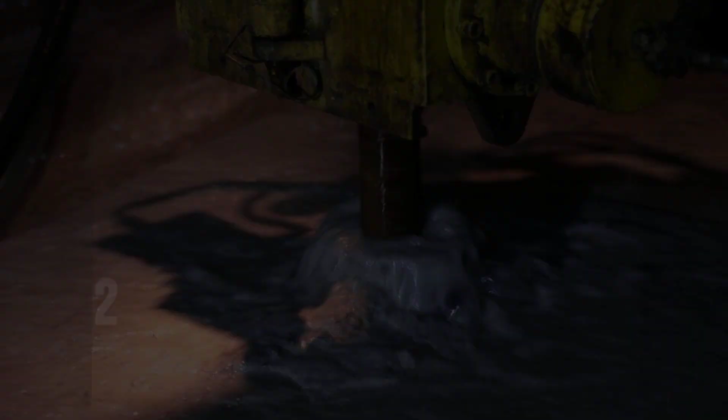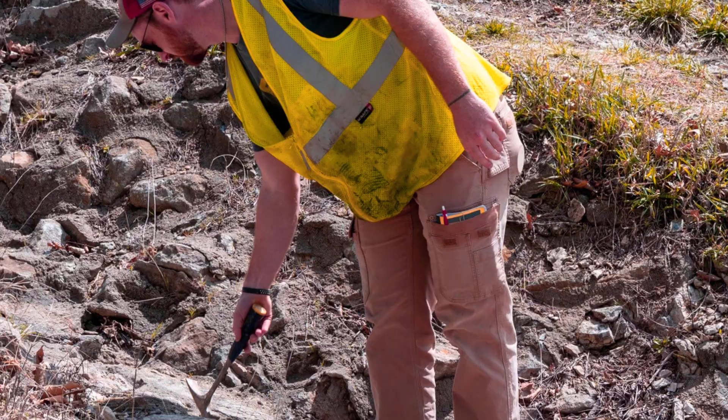If Mosul Dam fails, a wall of water reaches the city in under 4 hours. 1.5 million people live in its path. The only thing preventing that is a grouting operation that has run every single day since 1986. 24 machines work around the clock, filling a foundation that dissolves as fast as they can patch it. It all traces back to a decision every geologist warned against.

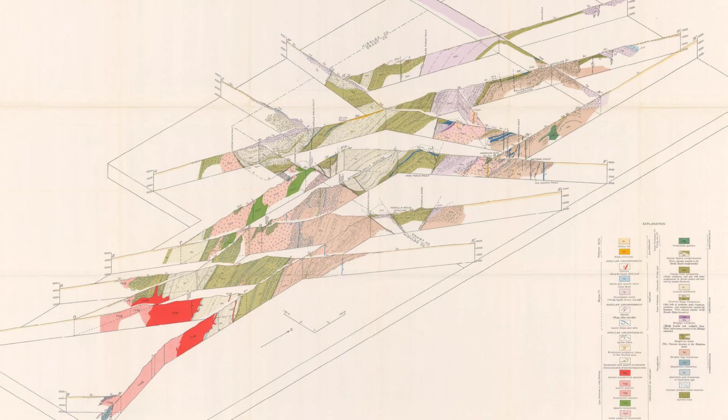In the late 1970s, teams of Soviet and Swiss geologists surveyed the Tigris Valley north of Mosul. Their field reports, preserved in archives from Moscow to Zurich, described the ground beneath the proposed dam as a labyrinth of gypsum, anhydrite, and fractured marl, a foundation that would dissolve when exposed to water.

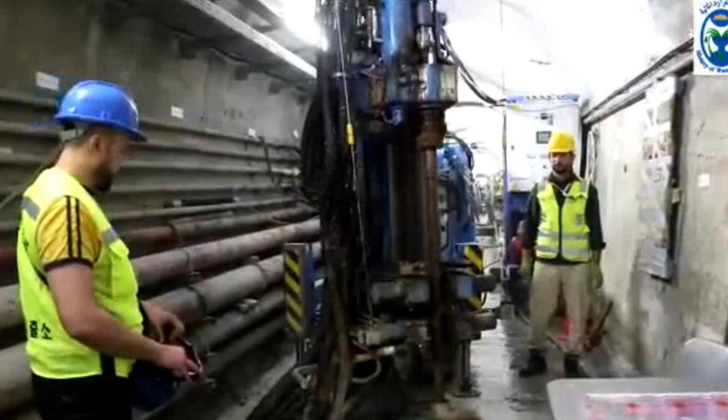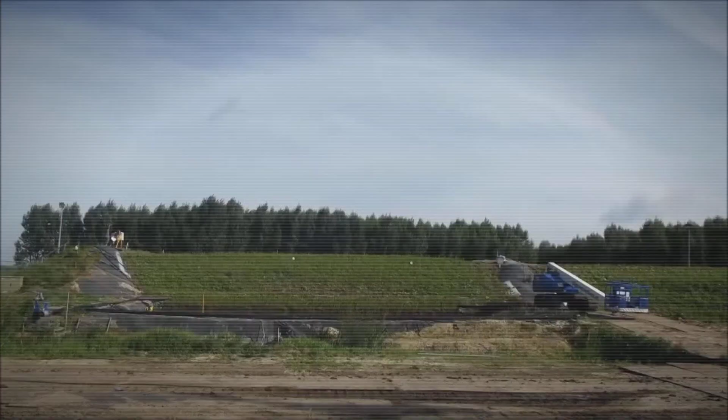The Soviet feasibility dossier, stamped IG-76 Mosul Year 1, called for a grout curtain extending at least 200 meters below the riverbed. The Swiss technical annex, signed by Dr. Walter Müller in March 1980, warned that only a full-width curtain and continuous monitoring could keep the structure stable. Both studies pointed to the same risk.

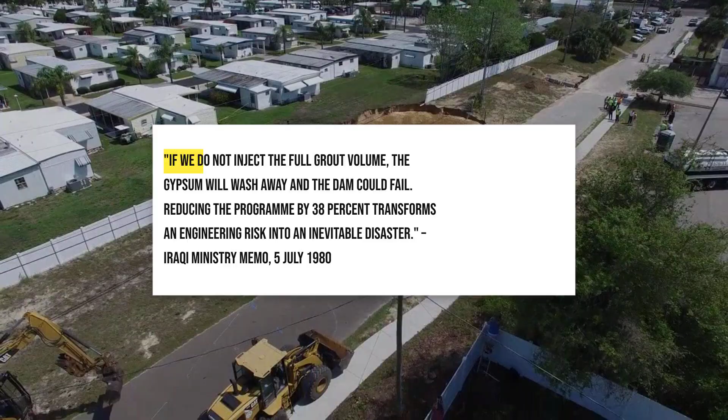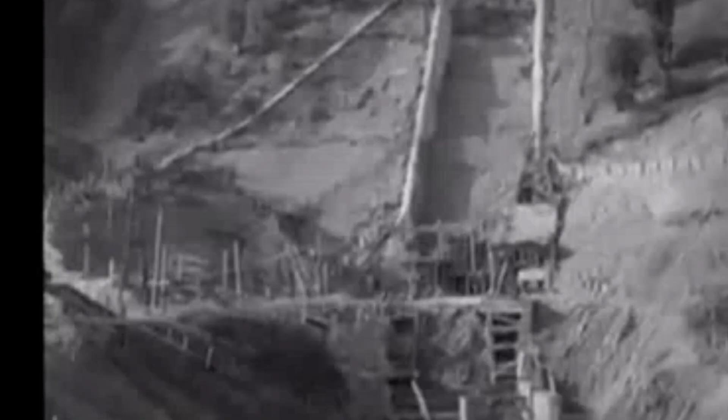The Fatha Formation's thick gypsum beds would behave, in the words of one internal Iraqi memo, like a sinkhole in a bathtub. Yet inside the Ministry of Water in Baghdad, the technical warnings collided with a different reality. In July 1980, budget ledgers show a 38% cut to the planned grouting program, redirecting millions to hydroelectric equipment.

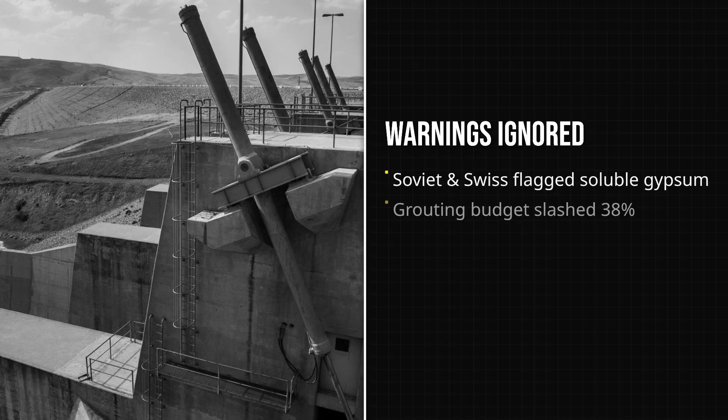Ministry minutes from September 22, 1980, record a meeting where Saddam Hussein's representative dismissed the foreign consultant's advice. The order was clear: proceed with construction, scale back foundation treatment, and finish the dam quickly to showcase national progress. Political urgency takes precedence over technical delay. By the time the final design was approved in 1981, only a minimal pilot grouting program remained.

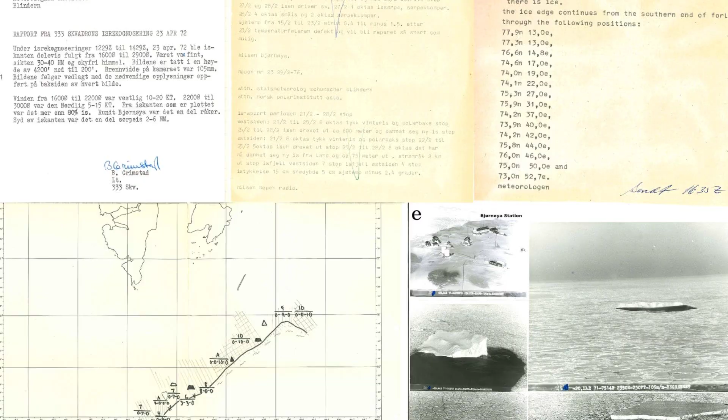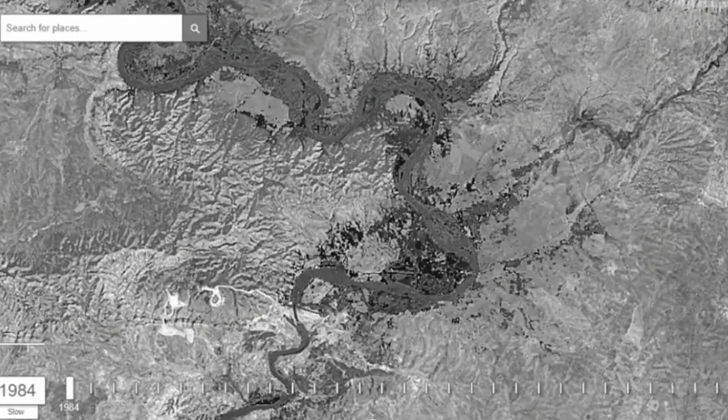United States State Department cables from early 1981, signed by geologist James L. Hendricks, warned that the dam's foundation treatment appears insufficient given the karstic substratum. But the decision had already been made. The dam would rise atop the dissolving Fatha Formation, its fate sealed not by engineering, but by decree. The consequences of that choice would surface as soon as the reservoir began to fill.

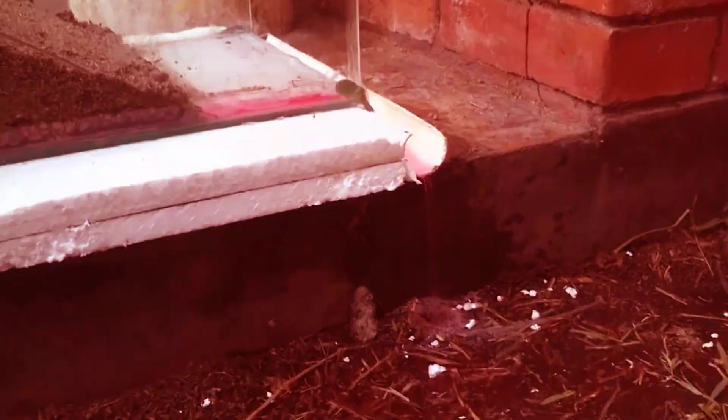Water first pressed against the dam's face in September 1985. Within weeks, engineering field logs noted a steady trickle seeping through the downstream toe. At first a nuisance, then a pattern. By early 1986, the seepage measured 150 liters per second, enough to fill a small swimming pool every hour.

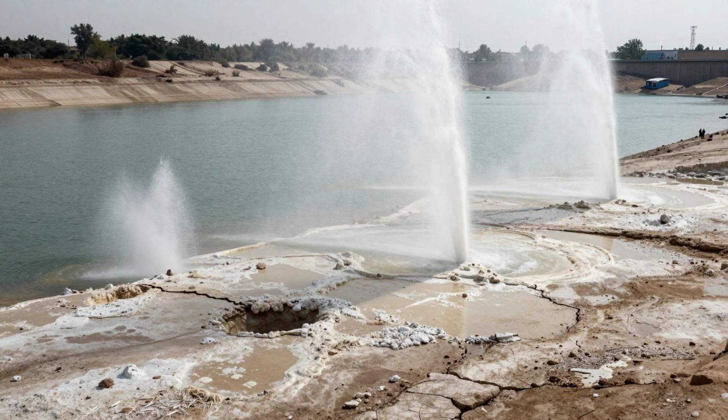Along the reservoir's edge, springs erupted in clusters, lining up at intervals of 150 meters, 300 meters, and 500 meters from the main embankment. Technicians mapped these outlets, marking each spot where clear water surfaced through the soil, carrying with it the chemical fingerprint of the Fatha Formation below. The numbers that followed did not belong in any engineer's comfort zone.

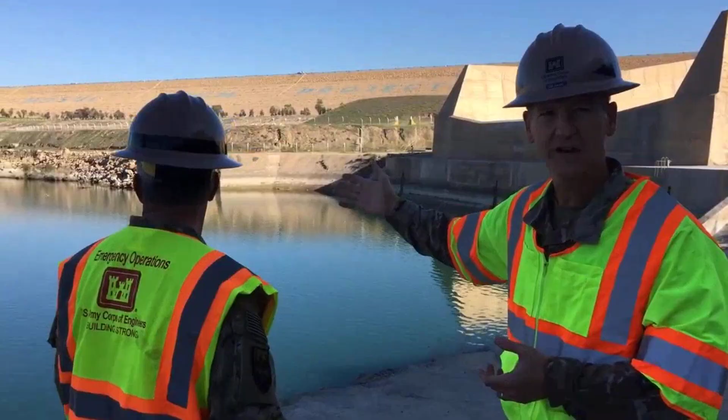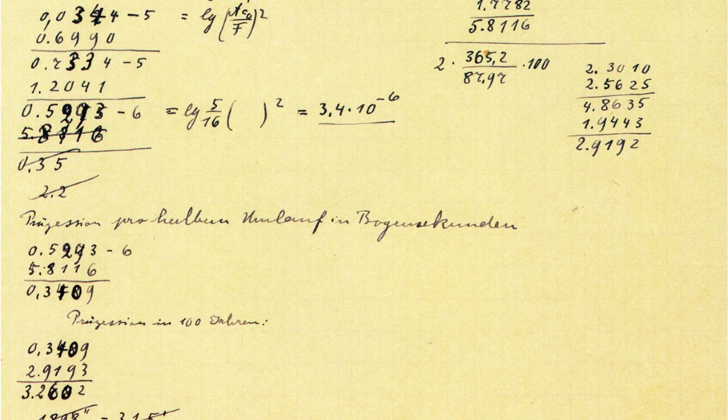Water samples from the new springs showed high concentrations of calcium sulfate, evidence that the gypsum foundation was dissolving directly into the flow. Calculations from the 1985 to 1986 field logs put the daily loss at 42 to 80 tons of gypsum, enough to fill 2 dump trucks every single day.

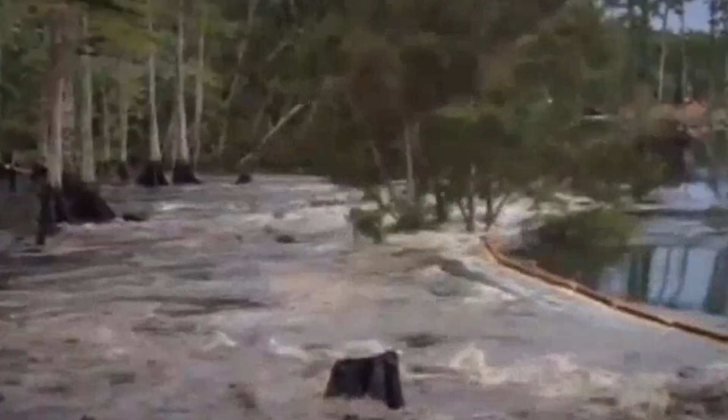Sinkholes began to appear in the downstream floodplain, some as wide as 12 meters, their edges collapsing into fresh voids beneath the surface. One Iraqi engineer described it bluntly: the ground started to eat itself. The Swiss consultancy's kinetic model, drafted years earlier, had warned of this dissolution rate if the grout curtain was incomplete. Now, the math was visible in the landscape itself.

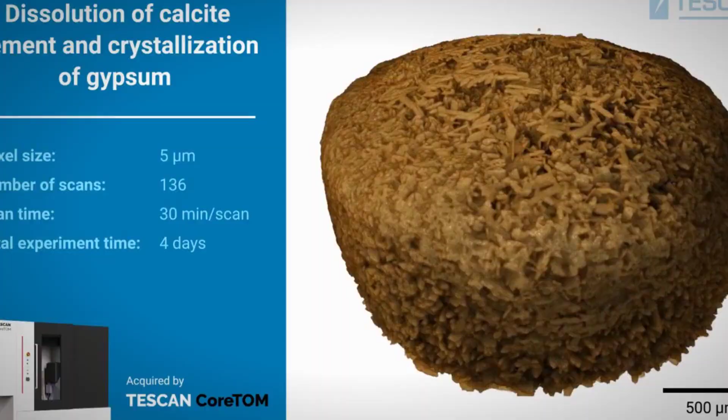Every day, the foundation lost more mass than the original grouting program could replace. The pilot grout curtain, scaled back by decree, proved no match for the chemistry at work under the reservoir. The dam's foundation was dissolving in real time, and the only response left was to grout, inject, and patch without pause. The numbers made one thing clear: this was not a problem to be solved, but a race that would never end.

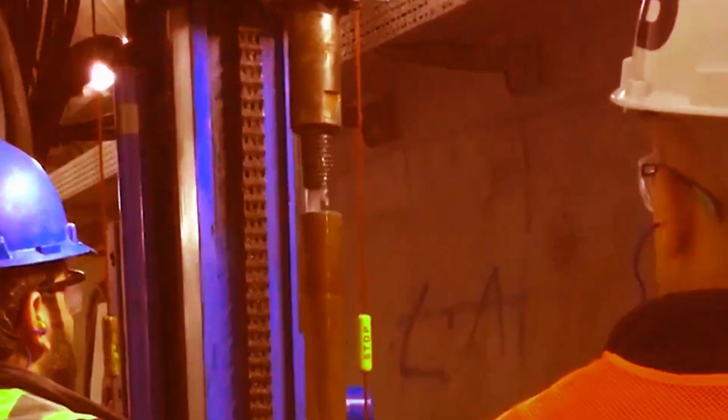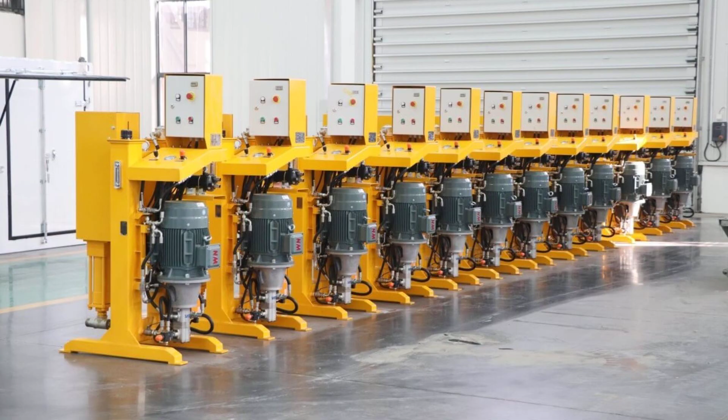Inside the galleries beneath the Mosul Dam, the routine never stops. Since 1986, a fleet of 24 grouting machines has worked in shifts around the clock, 7 days a week. Each rig drills deep into the foundation, pumping a cement clay slurry into the voids carved by dissolving gypsum.

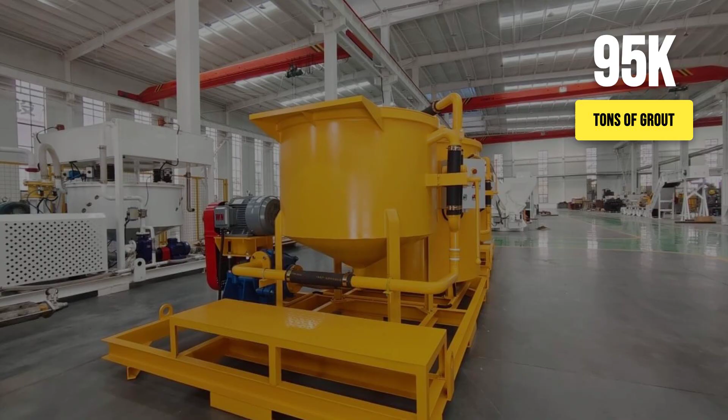Operations logs from the Ministry of Water read like a ledger of emergency. 95,000 tons of grout mixed, injected, and counted, enough to build a small city, all of it vanishing into the earth below. The crews rotate in 3 shifts, drilling, injecting, checking pressure, and logging every meter grouted.

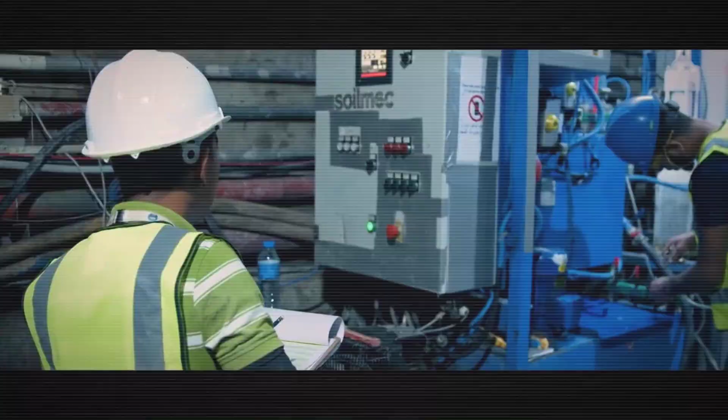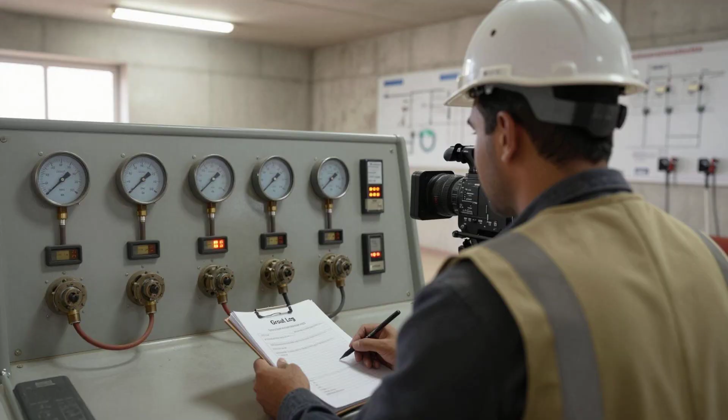If a pump fails, a replacement is wheeled in within hours. If a cavity is missed, water finds it. The dam's crest settles by 15 millimeters each year, a slow descent that never quite stops. One engineer described the schedule as a race with the ground itself.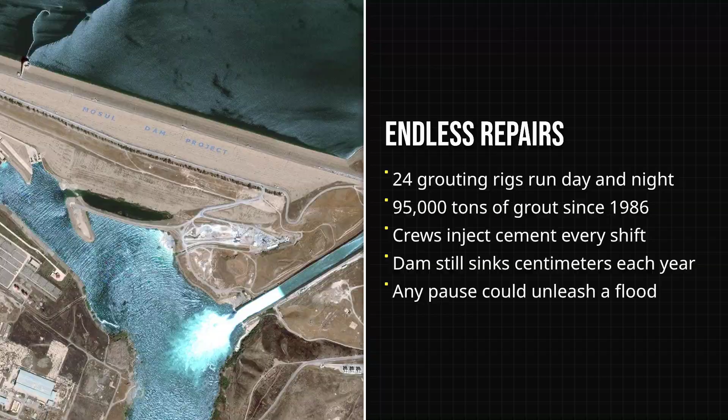The numbers tell the story: 24 machines, 95,000 tons of grout, and a dam that sinks a little more every year. Any pause, whether for war, budget, or broken equipment, means the foundation resumes its silent retreat. The system works, but only as long as the grouting never halts. And everyone on the crew knows what happens if it does.

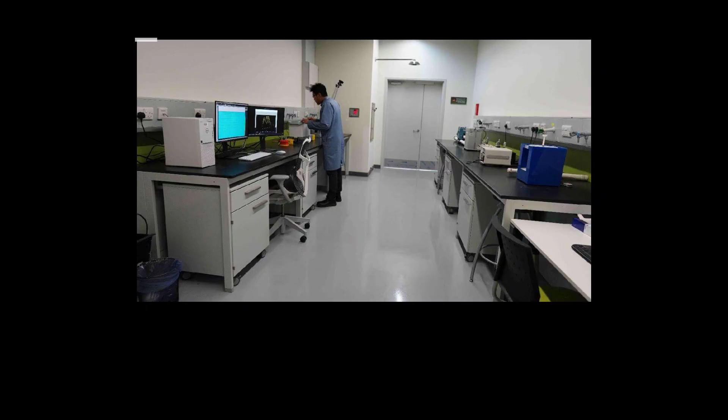Hydraulic models commissioned by European and American agencies have tried to answer a single question: what happens if the grouting stops and the Mosul Dam gives way? The most widely cited scenario, run by the Joint Research Center using a 2-dimensional shallow water model, calculates a peak flood discharge of nearly 12,000 cubic meters per second.

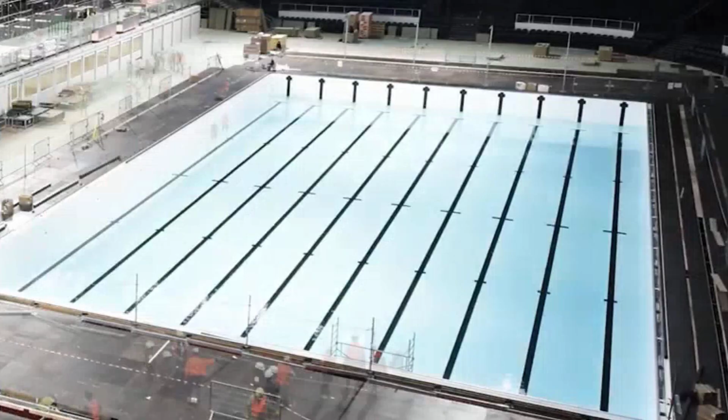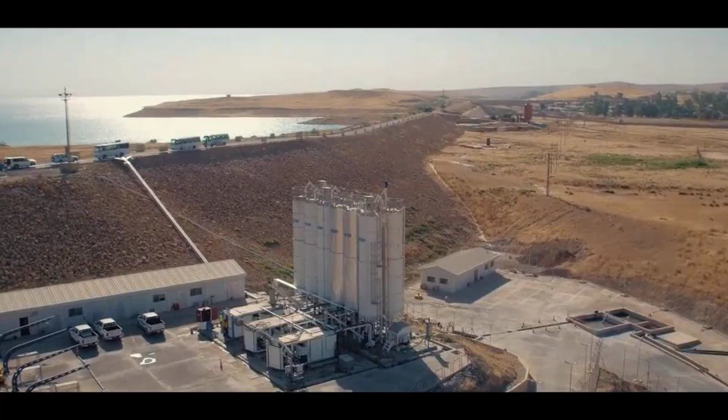That is enough water to fill 5 Olympic swimming pools every second, surging down the Tigris toward Mosul and beyond. The wave would reach the city in about 4 hours, overtopping riverbanks, highways, and power stations in its path. Engineers have tested the sensitivity of this disaster to the level of water stored behind the dam.

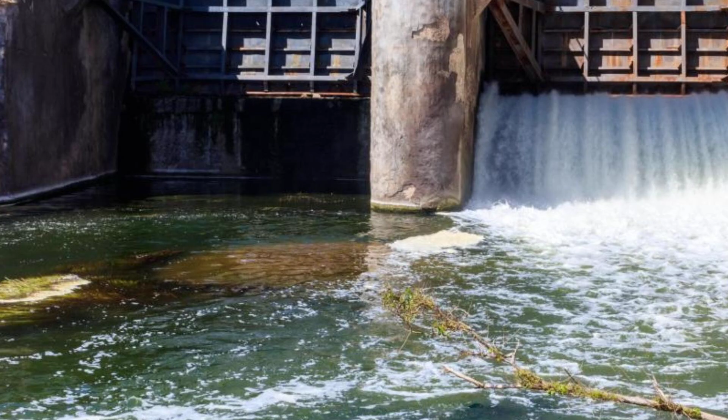Internal modeling from Iraqi technical teams, echoed in U.S. Army Corps of Engineers briefings, suggests that lowering the reservoir to 70% of full storage can reduce the peak discharge by about 30%. The Ministry of Water Resources has quietly adopted this as an unofficial safety margin, keeping the lake below maximum whenever possible. But the margin is thin.

Even at reduced volume, the projected flood would still overwhelm Mosul's defenses and send a surge downstream that would take days to subside. The economic consequences are mapped in red lines and dollar figures. World Bank exposure studies estimate direct damages at $6 billion US, not counting the loss of agricultural land, bridges, or the long-term impact on Iraq's power grid.

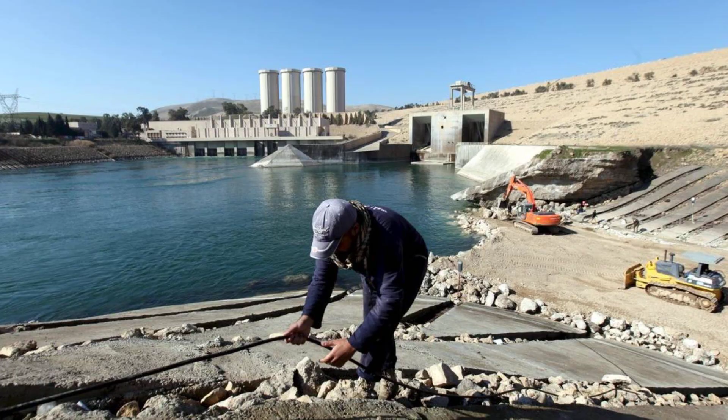One internal memo from a 2016 Risk Workshop put it bluntly: a breach at Mosul is not a local event. It is a national emergency. The numbers are abstract until they are not. They explain why, when ISIS seized the dam, U.S. General Sean MacFarland called it a weapon of mass destruction in the wrong hands. They also explain why every discussion about Mosul's safety returns to the same uneasy question: what happens if the patchwork fails, even for a single day?

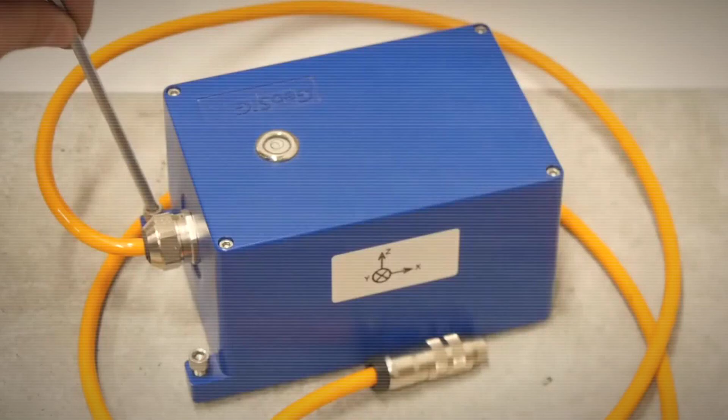On August 7, 2014, the Mosul Dam's pumps stopped, and ISIS took control. In just 11 days, decades of maintenance vanished. Nearly 30% of the dam's grout, thousands of tons, was stolen or lost. Sensors buried in the structure recorded a sudden, dangerous shift. Settlement rates jumped from 15 millimeters a year to as much as 5 centimeters. General Sean MacFarland called the dam a weapon of mass destruction in the wrong hands.

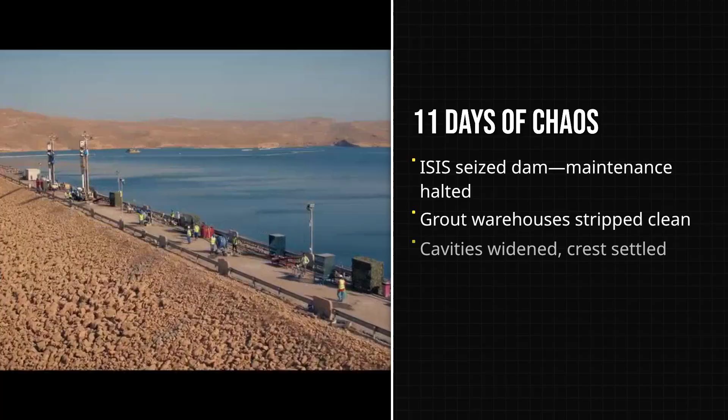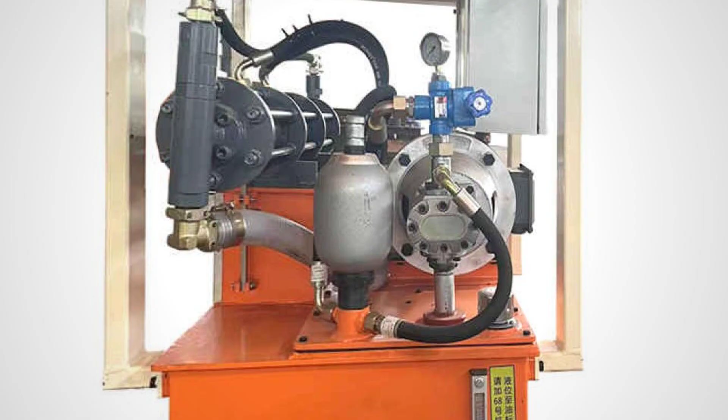The emergency response was swift but costly. The United States Army Corps of Engineers, AECOM, and Trevi SpA launched a $530 million stabilization effort. Over 3 years, crews drilled 1,200 new boreholes and injected 55,000 tons of grout. A dense sensor network was installed, and 250 Iraqi engineers and technicians were trained to monitor every movement.

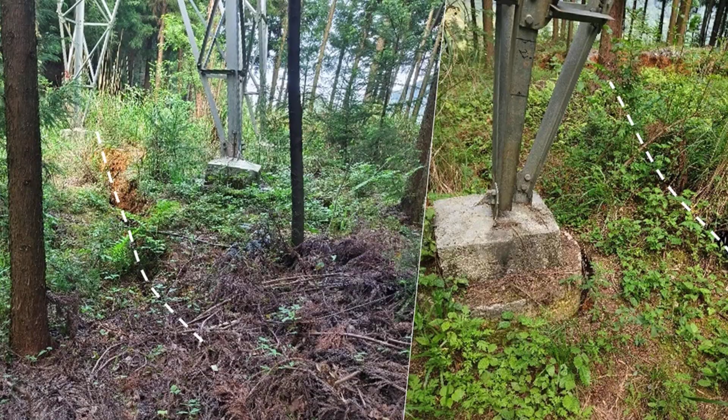Despite all this, the ground kept sinking by centimeters each year. The mission bought time, not certainty. When the dam was handed back in 2019, the risk remained just beneath the surface. December 2019 brought a formal handover at Mosul Dam. Iraqi officials raised flags and delivered speeches, marking the shift from foreign-led emergency repairs to local stewardship under the Ministry of Water Resources.

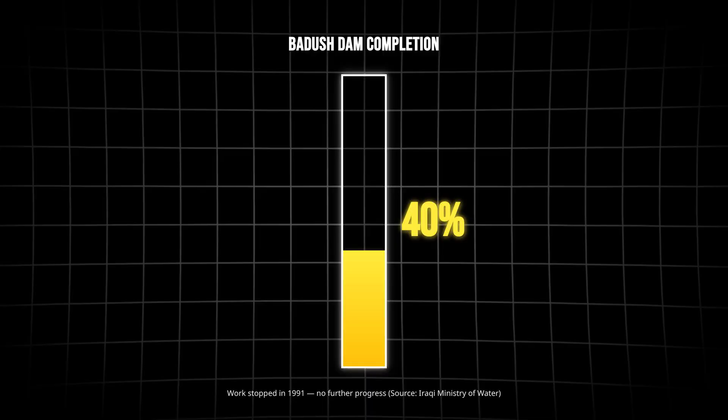Yet the Badush Dam, intended as the dam's safeguard, remained unfinished, just 40% complete, its concrete frame untouched since the early 1990s. No new contracts had been signed. Foreign expertise dwindled to 30%, with most international engineers replaced by newly trained Iraqis. Annual safety budgets now stood at $22 million from Baghdad and $8 million from the Kurdistan regional government, far less than previous years.

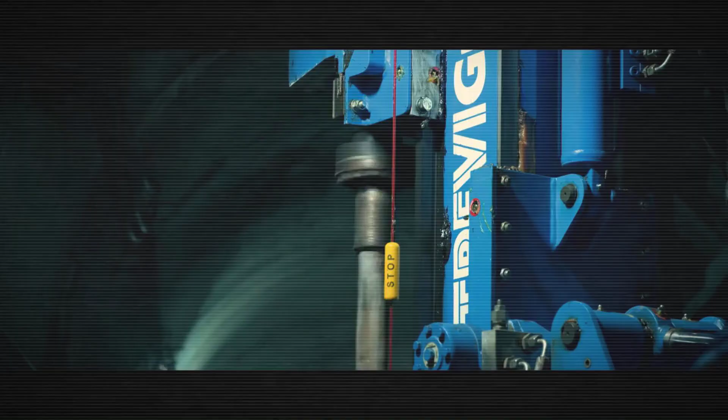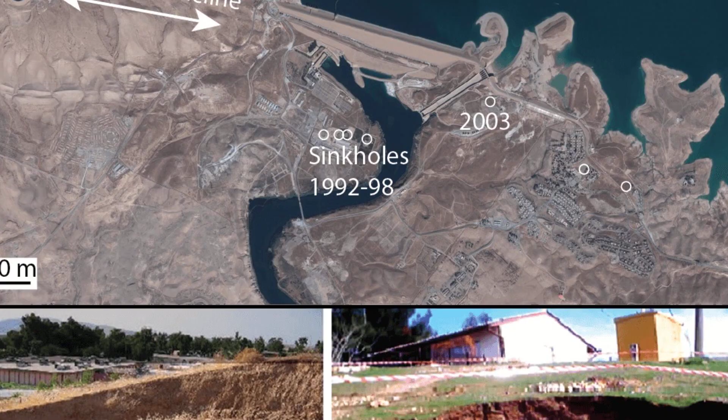In late 2023, engineers introduced a smart grouting pilot, trimming grout use by 15%, but the system's success depended on sensors and pumps keeping pace with the shifting ground. The foundation kept moving, the grout kept vanishing, and Badush remained a distant promise.

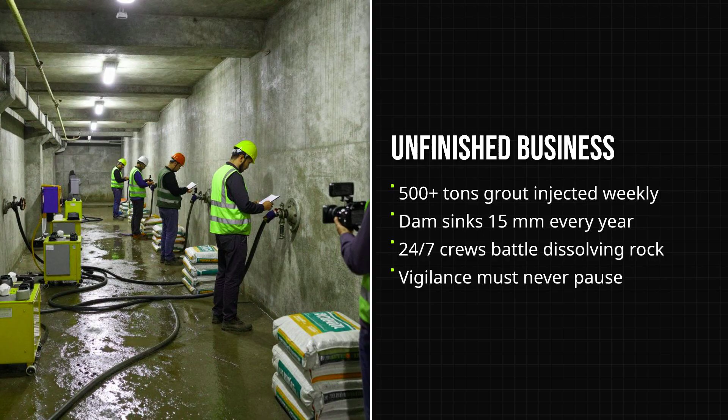Today, engineers still inject grout, sometimes over 500 tons a week, into a dam sinking 15 millimeters each year. As one U.S. general warned, this is not a fix, it's a race. The handover ceremony ended, but the math remains, and the water, as always, waits.